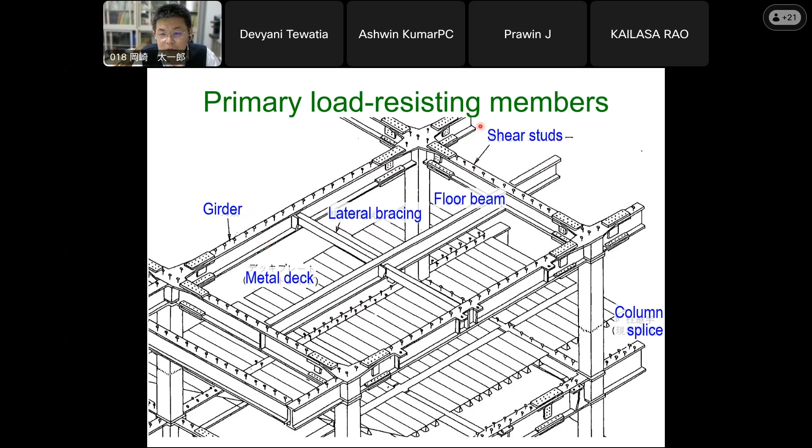Let's look at a real building example. This is a rather high-rise building under construction. This is what the beams and columns would look like in that particular building. The beams, or girders, are I-section beams connected to hollow square columns. The beam flanges are welded to the column, and the web is bolted to the column.

Later in today's lecture, I will go through the arrangement of these connections. On top of the girders, we see the metal deck, and on top of that there will be reinforced concrete cast. We have these kicker braces for the girders and some piping going through.

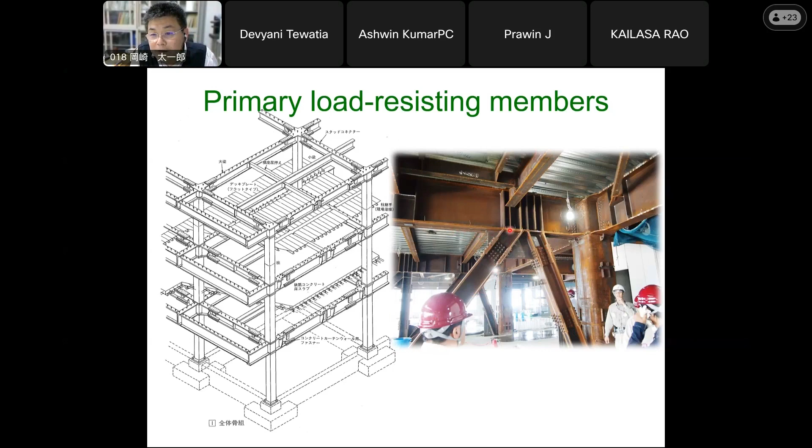The shear studs, small in this photo, are seen here. They are welded directly on the top flange. And the metal decking is tack welded to this flange, not entirely covering the top flange of the beam.

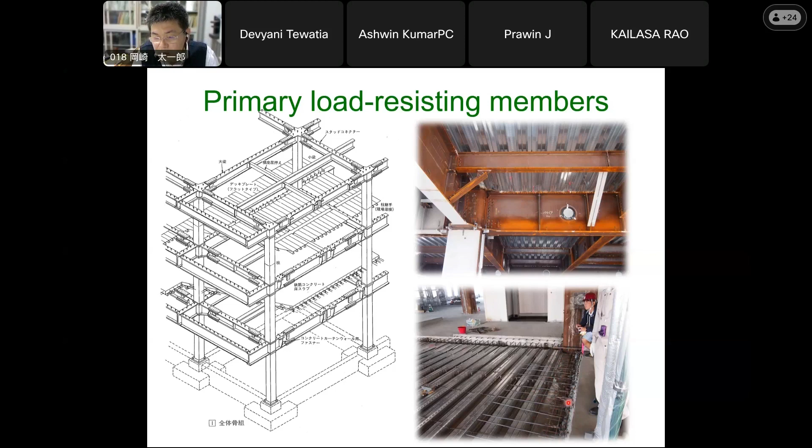Now, the typical steel products used in steel buildings are these. The columns in Japan are typically square HSS, or hollow structural sections. The beams are I sections. We heavily use corrugated metal decks, and most other sections are for supplementary items.

Now, looking at some of the connections in the photo, let's work from the top photo. Typically in Japan, I think this is a construction 7-8 years ago, so these days it's a little different, but we see fireproofing in the form of foam. These days it's more common to use wrapping material for fire protection.

This floor, the equipment in the ceiling is nearly done, so we see a lot of duct running through the structurally, supposedly important girders.

In the bottom photo, we see a column being spliced. And you might notice these white objects that are long vertically - these are the external claddings that are supported on the bottom side at the concrete slab, and probably on the top side by the beam.

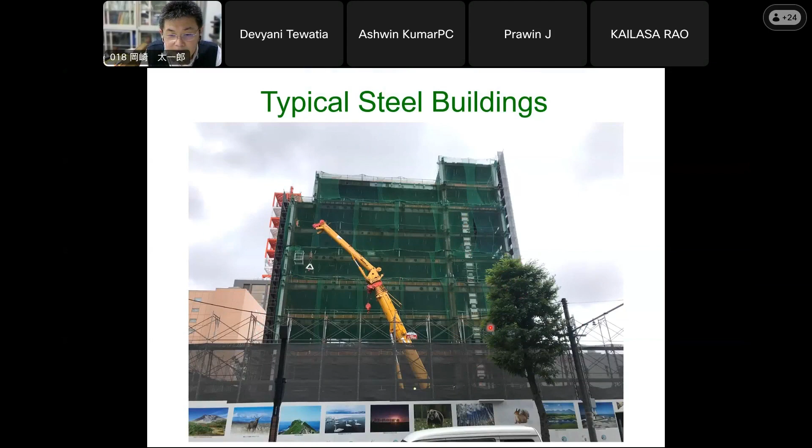Now, one of today's important messages is that typically in Japan, we favor constructing these column trees in the fabrication shop, so that much of the important welds are completed in the controlled environment. We bring these column trees, connect them vertically in the construction site, while connecting the columns horizontally by intermediate pieces of the beam.

This way, we can complete the critical welds in the controlled environment, and in the construction site, we can do much of the erection work by bolting. We do weld in this fabrication shop as in the field.

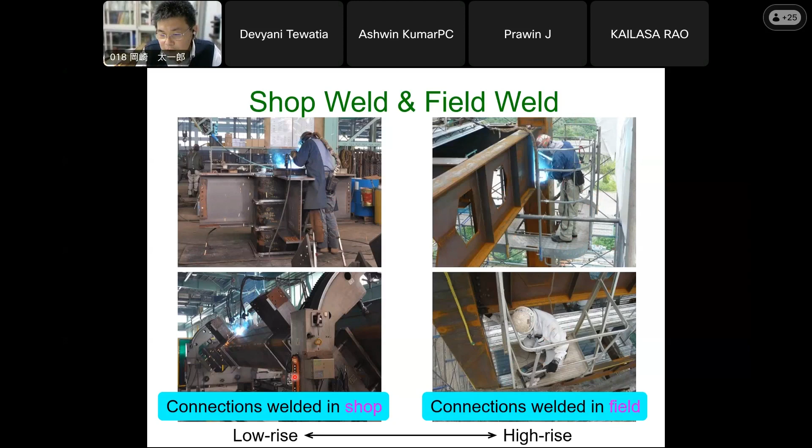Now, this left-hand side is favored, and we do this as much as possible. But when the columns and beams become too big, we need to give up and resort to the construction I'm showing on the right-hand side, which uses more welding in the field. Either way, the primary welds in Japan are done by gas shielded metal arc welding.

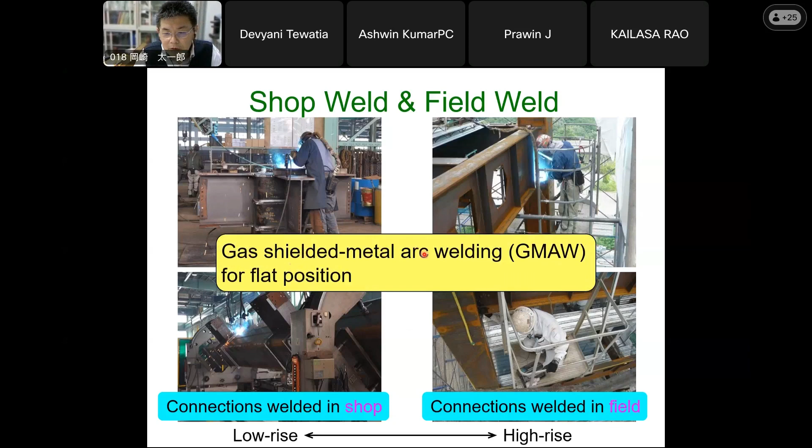Okay, so this is the more favored type of construction. The welds involved would be the welds to insert these thick diaphragm plates through the column. Why do we need this? This is because if you would weld the flange of the beam directly to the column, the compression or tension delivered to the column would distort the tubular shape of the column. So this, what we call the diaphragm plate, is the stiffener to stiffen the section and also to allow smooth force transfer between the beam and the column.

We need such diaphragm plates at the level of the top flange of the beam and the bottom flange of the beam. We need to insert two diaphragm plates at each beam. And this diaphragm plate requires CJP groove weld at both sides of this plate. And that's already a lot of welding. And once this diaphragm plate is inserted, we connect this beam stub to this diaphragm plate: the beam flange by CJP groove weld and the beam web by double-sided fillet welds.

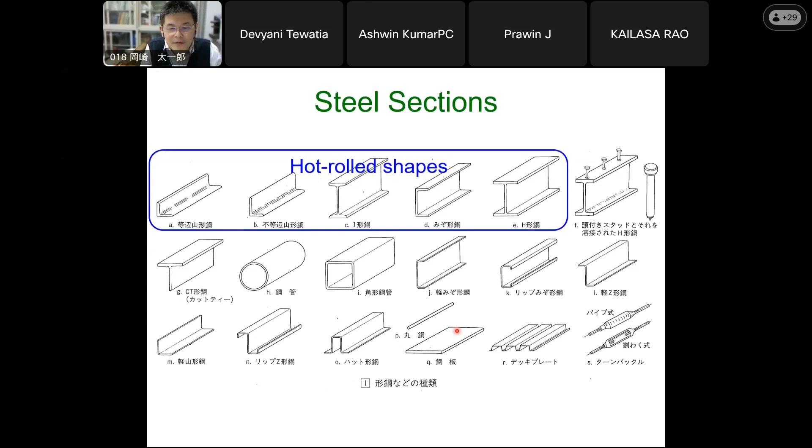This is the same diagram I showed. These are the steel sections, but they may be categorized by the way they are made. There are the hot rolled shapes, and there are the cold formed shapes and the light gauge shapes. Now, for beams and girders, we use I sections. For columns, we use these hollow tubular sections, especially the square shapes. But these are cold formed from plates.

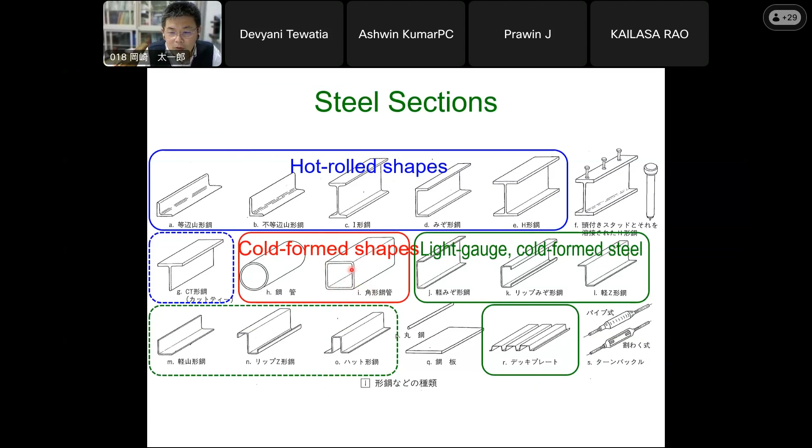Now, the steel approved, allowed, permitted for use in buildings are specified by our Building Standard Law. And the Building Standard Law says that there's this industry standard steel. Now, but this Building Standard Law was established in the 1980s, and since then there has been newer and better steel made available to the market. Those have not been implemented in the law, but instead they are approved per company, per factory by the Minister of Construction.

So I mentioned this last time. In Japan, there is the industry standard steel and the minister approved steel. It's a peculiar arrangement probably, and we have a variety of steel, but the primary ones are SS steel, SM steel, and SN steel. These steel grades are for hot rolled shapes and plates.

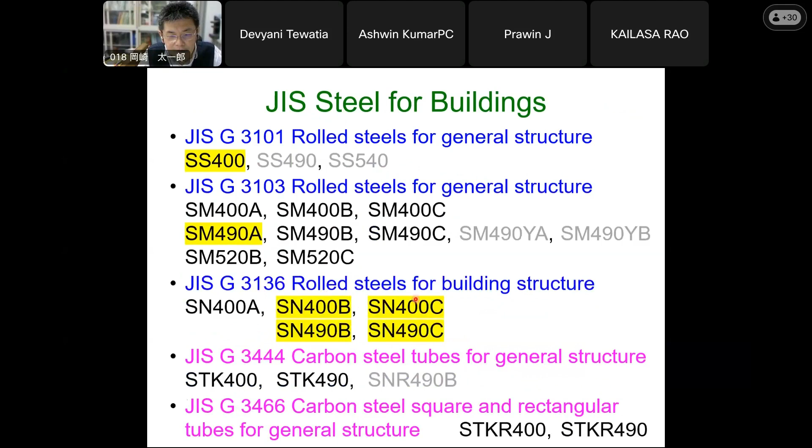Now, we also have the other category, minister approved steel, which tends to be more special, but for columns, we use BCR and BCP. These are formed from, flipping back one page, this SN steel, which is the primary structural steel we have available today, but because they are cold formed, they are categorized separately. These are essentially the same as SN steel.

So looking at the types of steel available in Japan, we have a big variety, but the primary ones are here. And among the primary ones, the really primary ones I highlight in yellow. Now, I compare this against what is used in the US or the EU. I'm not very familiar with what's done in Europe. And anyway, Europe doesn't do much seismic steel design. So comparing against what's done in the US,

to my knowledge, in the US, they almost always use this A992 steel, which has the strength grade of 345 for yield and 448 for tensile strength. Looking at what we have in Japan, the grade is somewhat lower, but this 490 grade is not too different. So what we use in Japan is not too different from the US, but anyway, we have a variety available in the market. We do have stronger grades, and the stronger grades are used for high-rise buildings.

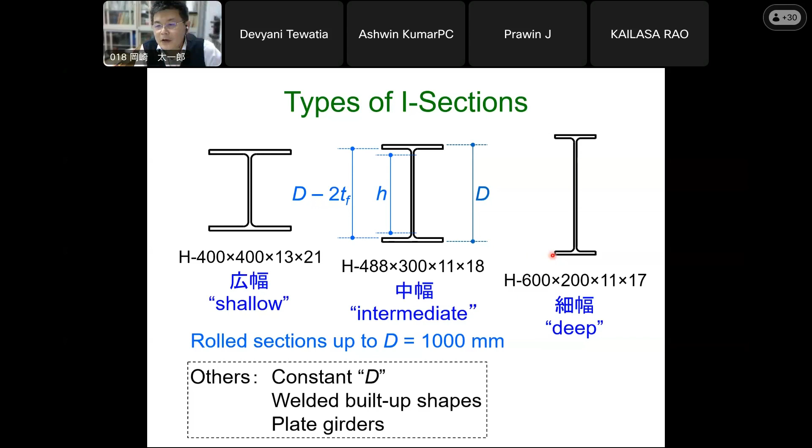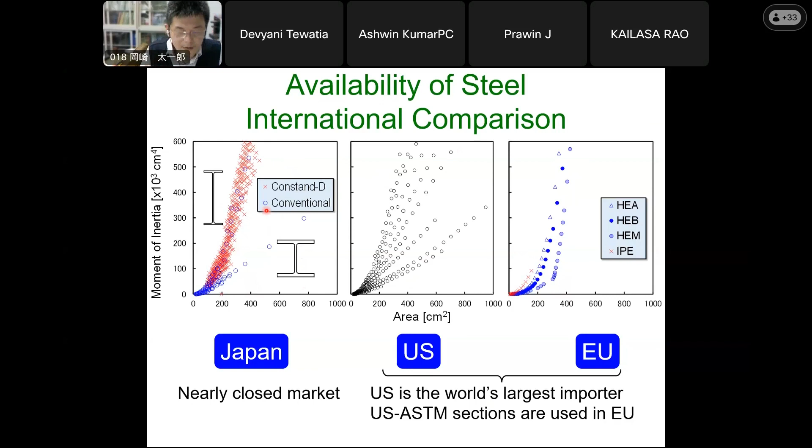Now, the reason I'm emphasizing this is that I hear from my international colleagues that one of the reasons steel is not very common in their country or area is the limited availability of variety. Even in Europe, the variety is much fewer than what's available in the US. Now, even compared to the US, the variety available in Japan for beams and columns is quite a lot.

This is one of the areas where our industry has placed a lot of effort. If there's more variety, the engineers can come up with more economical solutions so that steel buildings become a more feasible option.

Now, moving on to the next subject, a little bit on quality control. I will talk more about quality control in the last part, but let me try to summarize first before going in there. I mentioned the abundant variety of steel grade. The abundance is in dimension, but also in grade.

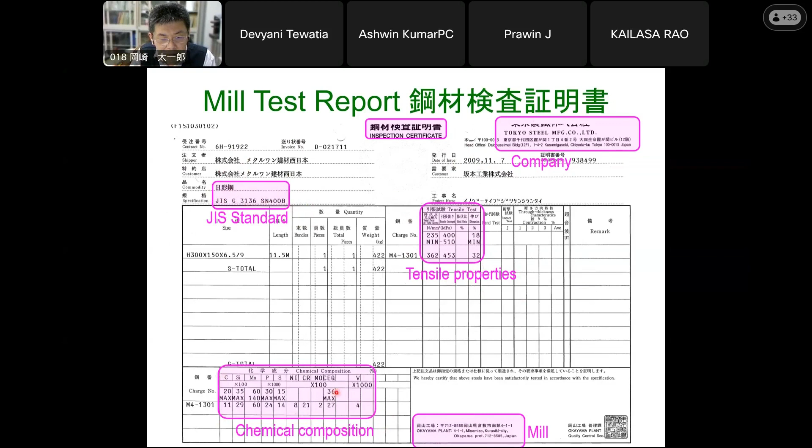The mill test report needs to identify the name of the company and the name of the particular factory or the mill that produced this. The mill test reports produced by a different company may look a little different. In this case, it says that the delivered steel qualifies as Japanese industry standard SN400B. The sheet gives the tensile properties and the chemical compositions, which were the basis to judge that it qualifies as SN400B. It also gives the name of the company, I'm sorry, it's trimmed out, and the name of the factory that produced the steel. This information is required for quality control.

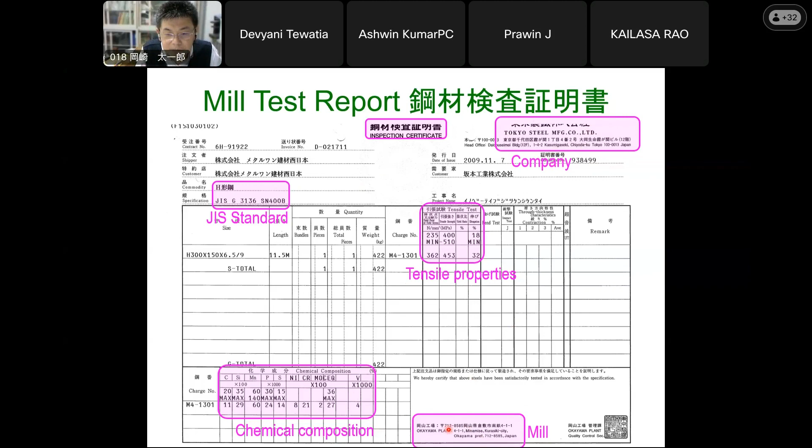Now, among the schemes that are adopted for quality control is this fabricator certification. Actually, it's not all, but most, the vast majority of steel fabricators earn this certification. There's a grade J, R, M, H, S, and S is for probably super, is the highest grade. The number of fabricators we have is something around 2,000, and only 1% of those 2,000 qualify as the super grade. Now, S is probably for super, H is for high, and M is for medium.

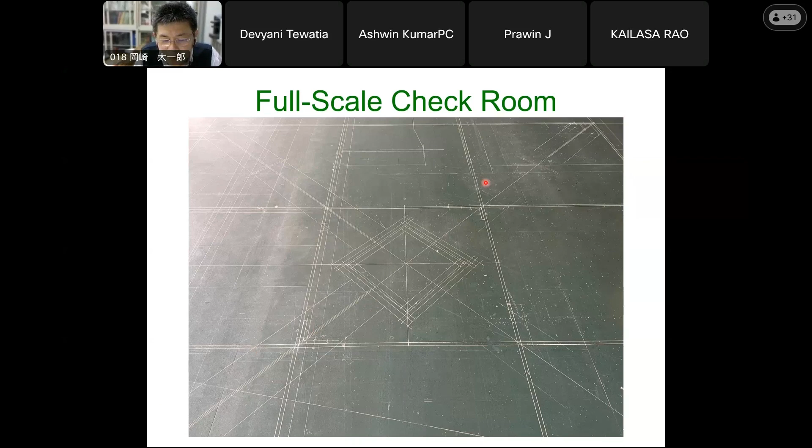Now, this is interesting. This photo has historical significance. This is a one-to-one drawing of the connection that is drawn on the floor. This is probably the plan view of the column and the beam connecting into this, and very straight lines. This is really drawn one-to-one, and if you go to steel fabricators in Japan, you might come across a room like this, typically in the roof floor of the shop.

Probably 30 years ago, this floor was full of chalk drawings, so that the engineers could come to discuss the detailing of connections and the complicated arrangements of the steel work.

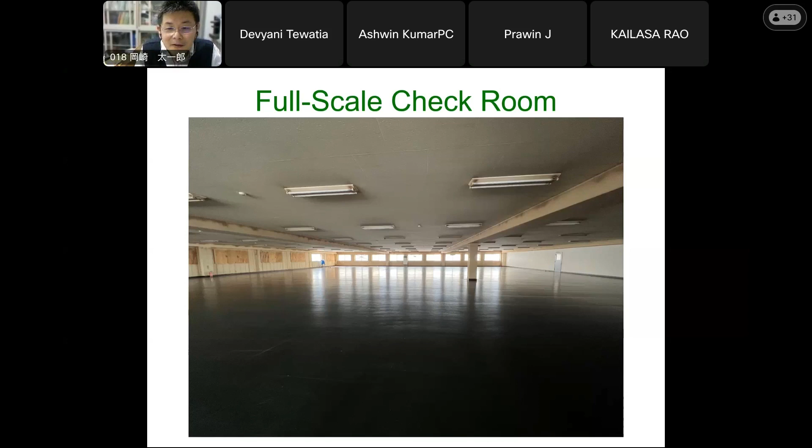Maybe you're wondering, yes, this is old-fashioned. These days, everything has been replaced by AutoCAD, computer-aided design, and looking at monitors. Sometimes, because this floor area is available, they would print the drawings one to one and spread them on the floor. But otherwise, this check room is historical.

I mentioned that all the primary welds, or most of the primary welds in Japan, are done by gas shielded metal arc welding. I'm not aware of any other country that does this. I know that in Europe and the United States, flux core arc welding is the primary type. I don't know what it would be in India. This is a semi-automatic welding process where the wire is being fed as the welder is welding, and simultaneously there is shielding gas shot around the electrode. The shielding gas is a mixture of carbon dioxide, maybe not entirely good for the environment, and inert gas such as argon and helium, such that the molten weld is secluded from the atmosphere, especially oxygen.

Please keep note that this is the choice of welding process favored in Japan. The same gas shielded metal arc welding is done in the fabrication shop or in the field.

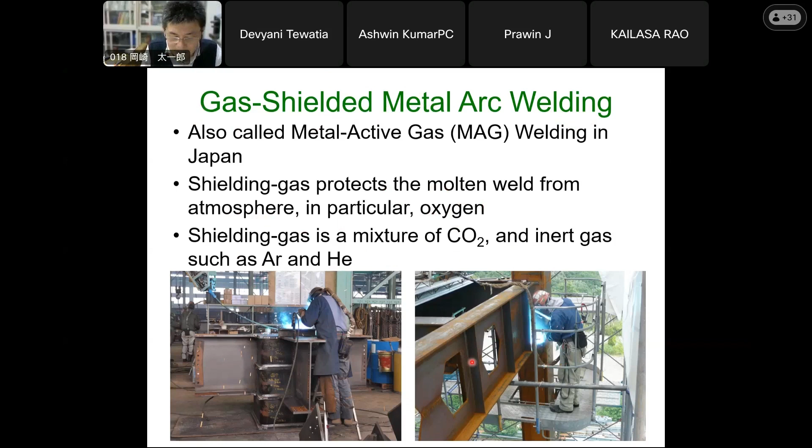The quality of welding is controlled in two ways. One, by licensure - all welds must be completed by welders with the right license. The license is classified by plate thickness, the welding procedure, the groove geometry, and whether or not backing is used to complete the butt weld, and the welding position: flat, vertical, or overhead. There is a license for simple welds and all variety of more difficult welds. Welders need the right license to complete the welds, and there is a record kept on who, with what license, made each of the welds.

Of course, a license is also required for the weld inspectors. Now, the second scheme for quality control is the inspection. All columns and girders are checked for quality control by ultrasonic testing, as well as visual inspection and direct measurement. The sections, dimensions, and length, especially of columns, are measured, and I believe they have to be within 2 millimeters, otherwise they cannot be delivered to the construction site.

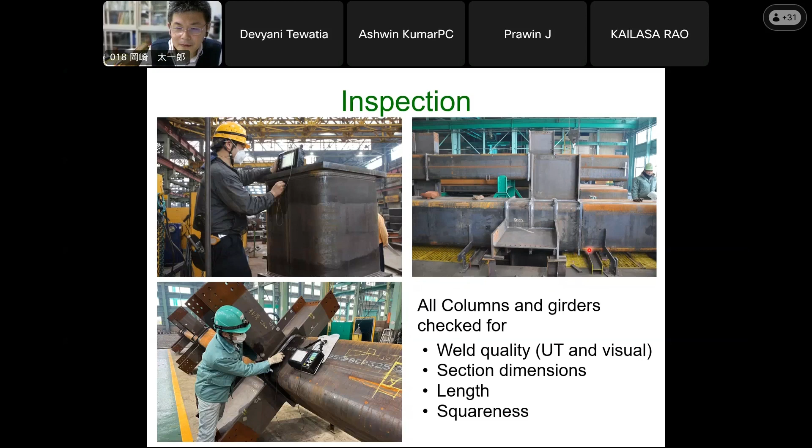Now, moving on to how buildings are actually constructed. I'm putting together the information I've discussed so far, with more details, to walk you through how buildings are constructed from steel - from the mill, through the fabrication shop, to the erection process.

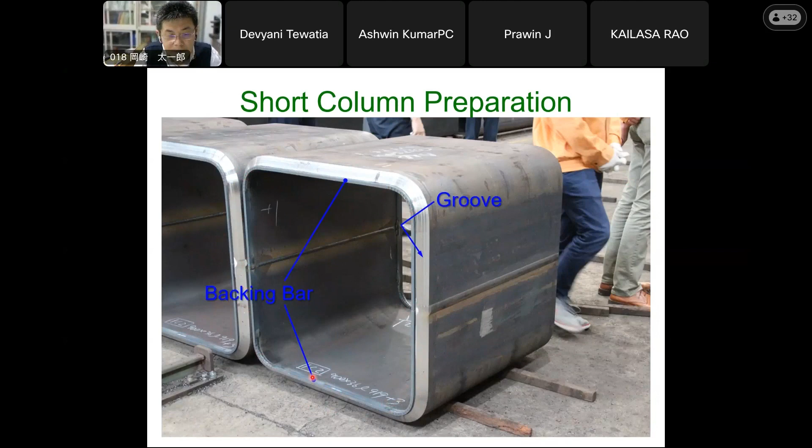Okay, the backing looks like this. We have these perfect backing plates. They perfectly match, wrap around the corner and match the section. Let me go back one step. So probably it needs to be cut to adjust the length, but otherwise it wraps around the corner nicely, so that we have continuous backing around the section. The backing bar is attached by tack welding, and this fabricator is also welding these slits to stiffen up the backing bar.

Now, such a short segment of square HSS is attached to two diaphragm plates. The backing bar is hidden here, but we see the root of what's going to be the groove weld. There's another tack weld attached to connect the backing bar to the diaphragm plates. Now, these two grooves between the short HSS and the diaphragm plates are going to be completed with CJP groove welds.

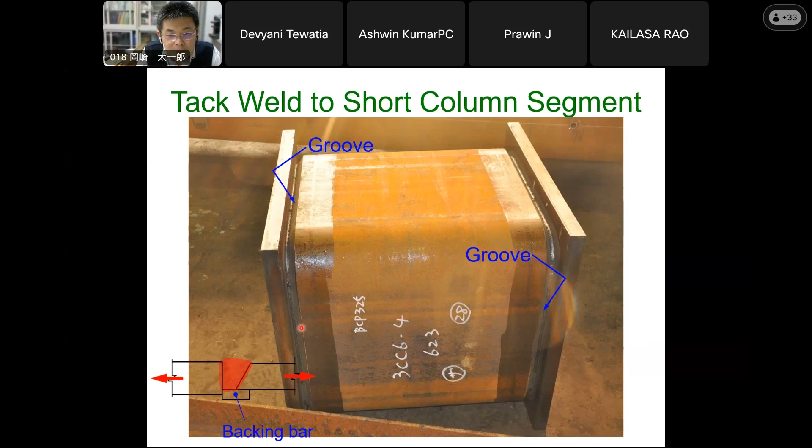Oftentimes, this is automated. These closed sections are favorable for robotic welding because you might see that this table has the shaft so that it circulates. As the column is rotated, the robot only needs to make sure it is following the groove. And the rate is controlled so that the weld may be placed continuously without overheating the weld.

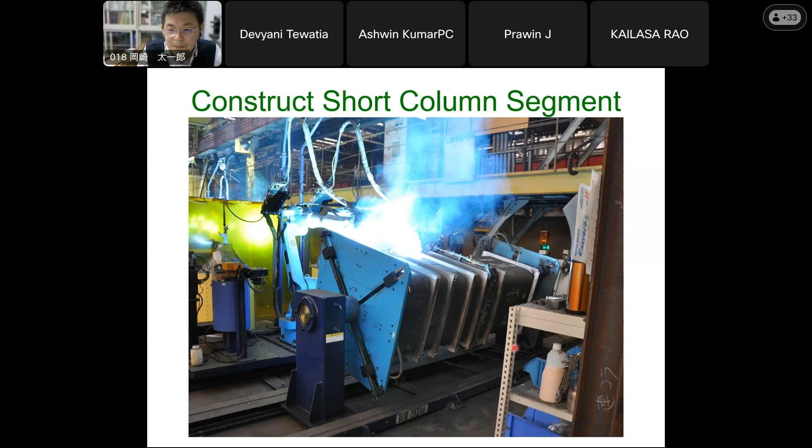Okay, so once this piece, which we tend to call the dice, formed by the short HSS and diaphragm plates, is done, this is the first CJP weld completed, so this needs to be inspected. It makes sense to inspect at this stage because we don't want to find problems after everything is assembled. Okay, inspection is done here.

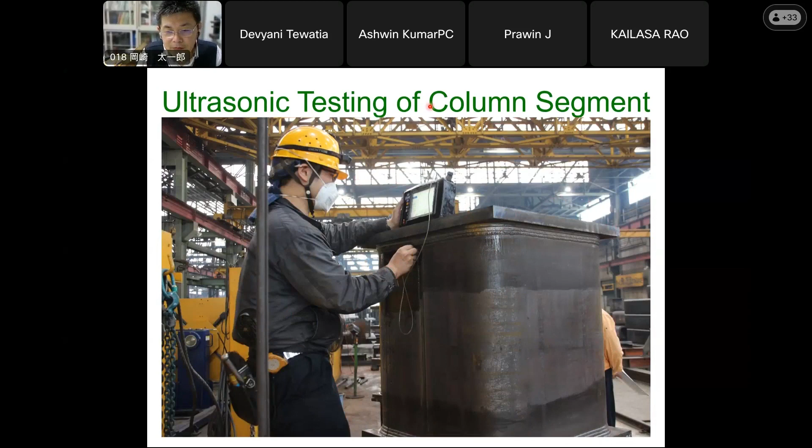Afterwards, the beams are coming in. The beams are cut by bandsaw. And if there are bolt holes, the bolt holes are drilled. And this same machine that drills bolt holes also prepares the groove and the weld access holes. You might notice this is a rotating blade, which is placing the groove at the top and bottom flanges simultaneously as bolt holes are being drilled.

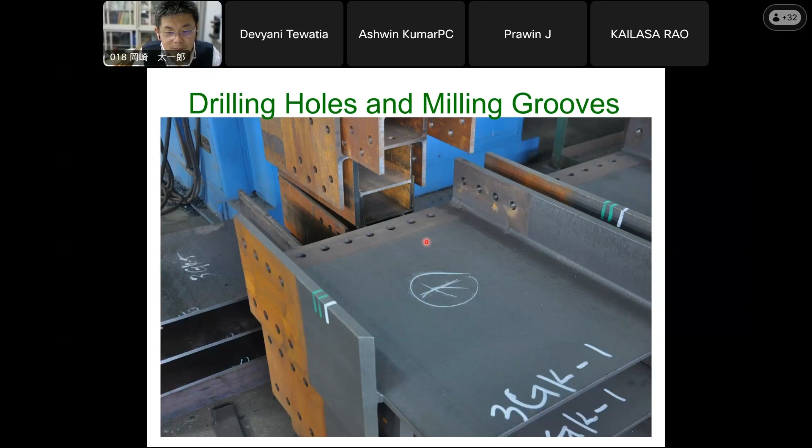Okay, the short beam stubs may look like this. The side closer to the bottom right is going to go to the column, and the part farther apart will be bolted to intermediate beams at the erection site. Such beam stubs.

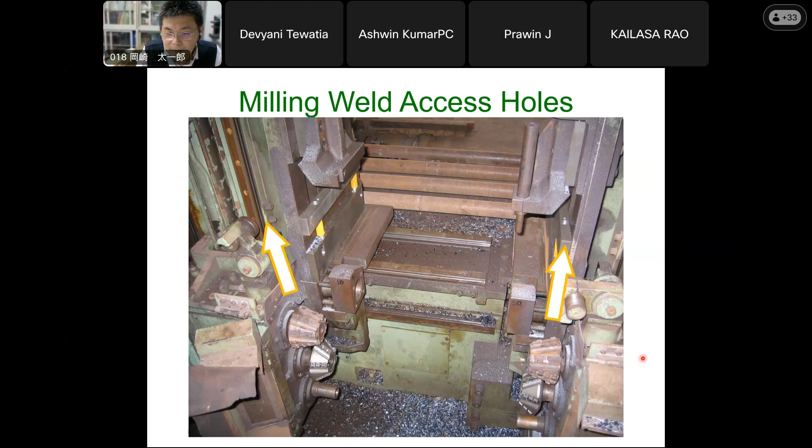Okay, this is another view of the similar machine that prepares the groove and the weld access hole. The weld access holes, as well as the groove, are completed by a set of blades. There are two tables on the left-hand side and the right-hand side. These go up and down to complete the weld access holes as well as the grooves. The short beam stubs may look like this or this.

Now, in the old days, there was always a weld access hole to complete the CJP groove welds for the beam flanges, but more recently, the fabricators are comfortable with completing the beam to column connection without a weld access hole. Now, this is possible for a couple of reasons.

One, this piece is being fabricated in the fabrication shop so that the CJP groove welds can always be placed continuously from outside. If the welder needs to complete the welds in the fixed position, they have to place this weld from above. But the welder only needs to flip this piece upside down so that he or she can complete this weld from outside.

After the 1995 Kobe earthquake indicated problems with weld access holes, people started shifting to removing the weld access holes entirely. Probably nearly 90% of the larger fabrication shops would be adopting this no weld access hole procedure.

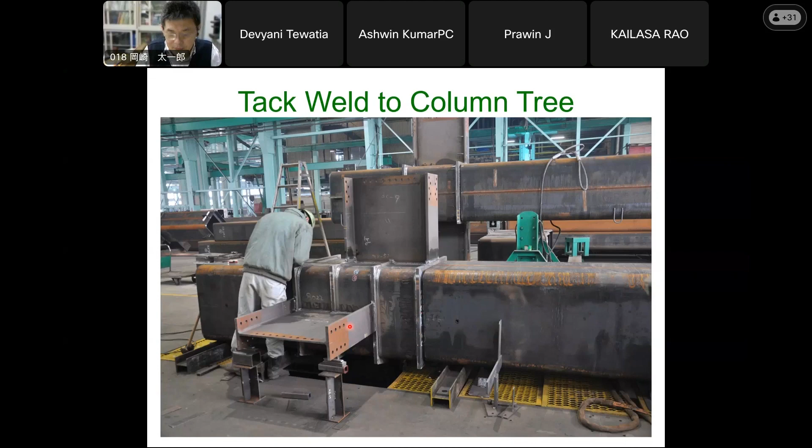The big welds are typically done by robots. We have one connection piece with many beams coming in, a second one, and there may be a third one outside of the frame. I didn't bring video today, but this machine rotates the column, and in this case there are two robotic torches that just need to follow the groove. And of course, at this stage, the inspection is done.

If you go to a steel fabricator in Japan, there will be many of these pieces. Each of the big pieces may be priced at something - I'm sorry, I cannot convert to Indian rupees - but in US dollars, the big pieces will be priced at something like 30K or 50K. A lot of work, not a lot of steel, but a lot of work.

There's not much to talk about for the beams, but sadly there is, because there tends to be many stiffeners and many holes.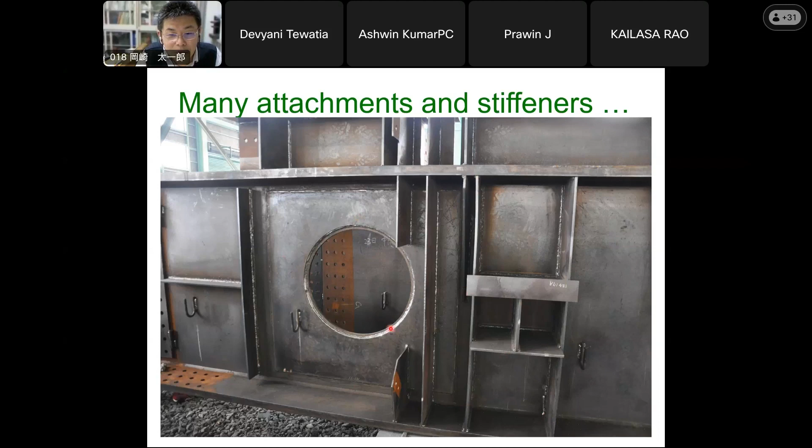For bracing connections, the bracing connections might be done like this. The bracing connections may need to go to the column as well as to the beam, so it's good to extend the beam stub a little further, so that the gusset plate or the bracing connection fits within the column tree.

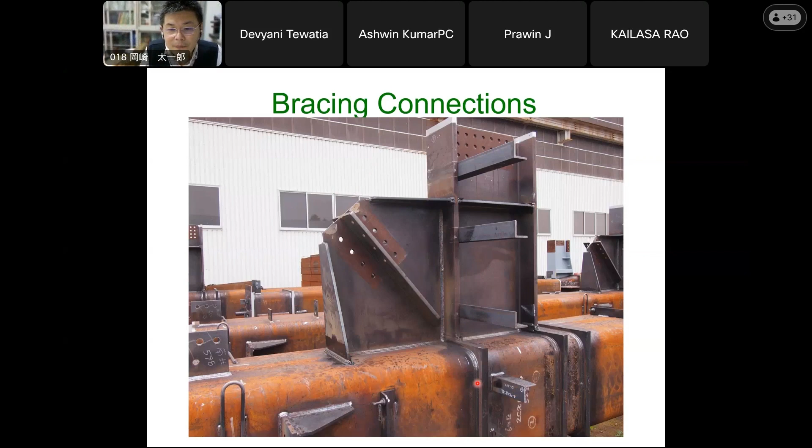Now such a piece is brought to the construction site. These column trees are connected vertically to each other and horizontally through intermediate beams.

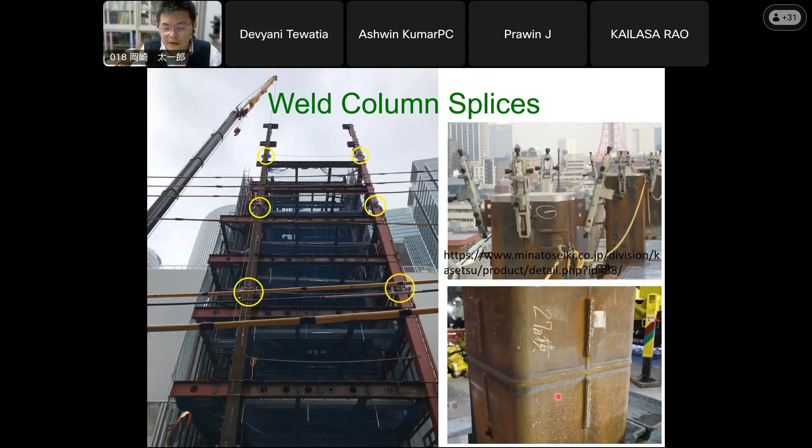The primary pieces would be the column tree and the intermediate beam portions. I emphasize the fabrication of the column tree because there's a lot to it. A lot of welding and a lot of quality control.

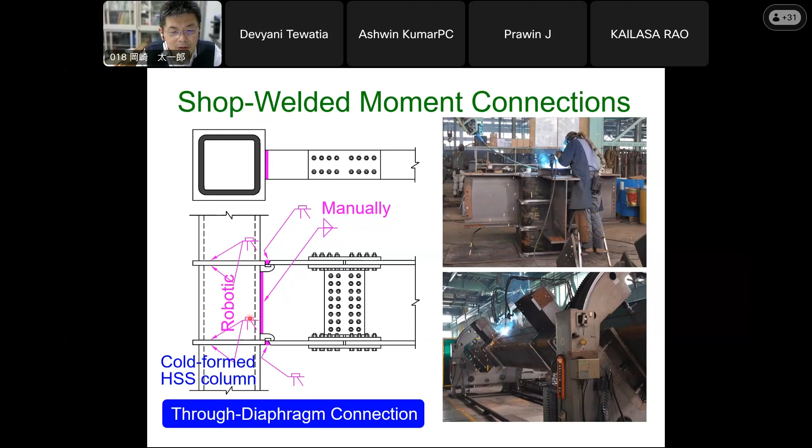Now, I thought it's worthwhile to mention a little bit about column base connections. In Japan, we say that there are 3 different column base types. One where the base plate is exposed above the foundation. The second type, the column base plates will be further wrapped around with reinforced concrete. If you wrap the column base with reinforced concrete, you can stiffen up the column.

Another method to stiffen the column is to embed the column base inside the foundation. This would typically mean that the column base plate will be buried in a deeper part of the foundation, and after the base plate is anchored, the upper part of the foundation will be completed, filled with reinforced concrete. Anyway, the encased method and the embedded method require a lot of additional work. Therefore, the vast majority of steel buildings that do not have a basement will adopt this exposed column base.

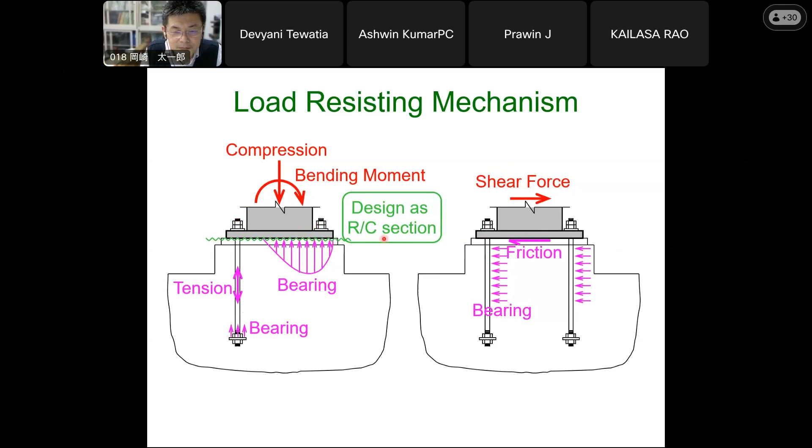Looking at the possible failure modes or the load resistance, we expect compression to be delivered through bearing against the foundation. That's fine. But when there's bending moment, we rely on the anchor rods to resist, and they help substantially in resisting. The anchor rods are also expected to bear against the foundation to resist shear force. But by far the most important is what to do with the tension delivered to the anchor rods. Typically, these exposed base plates are designed by viewing this green section as a reinforced concrete section. The issue is how to develop these anchor rods.

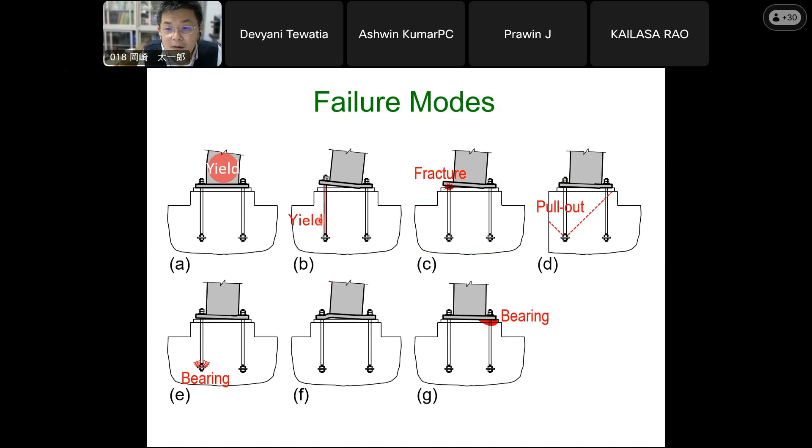The failure modes may be categorized into these, but there are favorable ones and non-favorable ones. The favorable ones would be these three, because the ones that I crossed out, this one's also bad. Fracture is definitely bad, but anchor failure and crushing failure and pull-out failure are very non-ductile. Bending of the base plates is probably good, but this is not chosen in Japan. So engineers either choose to yield or form a plastic hinge in the column, or to allow the anchor rod to yield and extend.

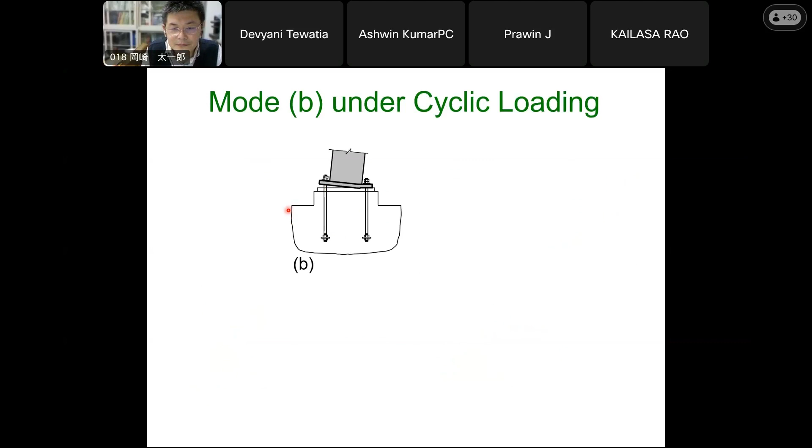You repeat this a couple times, then the anchor rods will all be extended like this. You might notice that there is no moment resistance in this system until the base plate rotates enough to engage the elongated anchor rod.

There is good ductility in such behavior, but we have to make sure that these anchor rods behave in a ductile fashion.

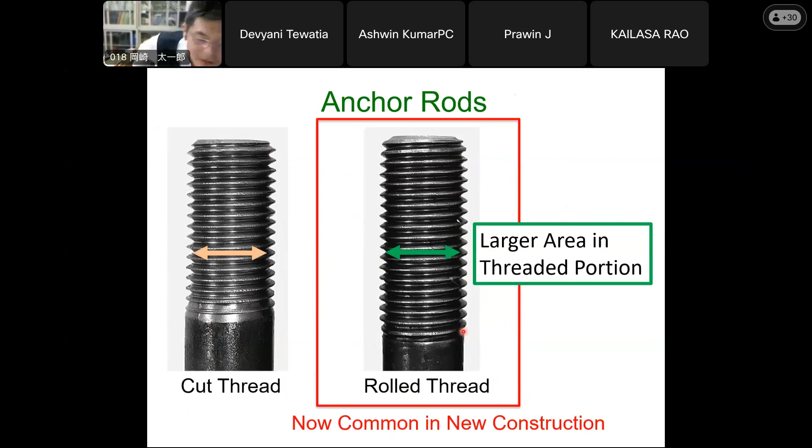Now, let me move on to the last section of today's lecture. How are high-rise buildings constructed?

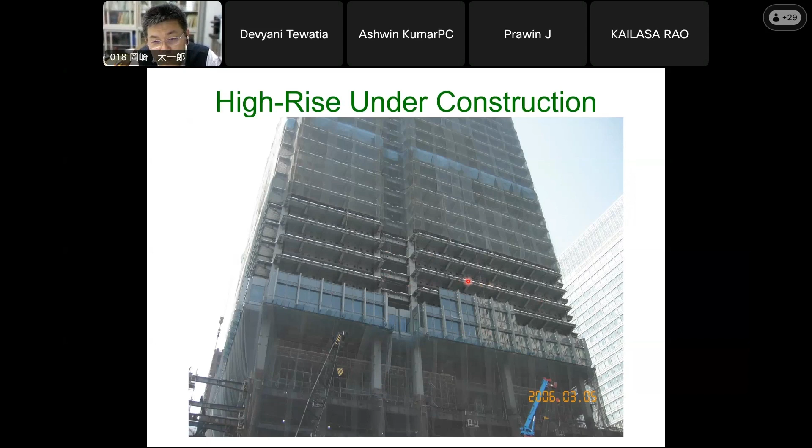A close-up view, you might notice that the I-section beam has widened flanges near the beam-to-column connection. And in a magnified view, the column is a square shape, but it is so big that it goes beyond what can be bent.

These are welded, built-up column sections. We don't have that protruding diaphragm plate. Instead, it's not visible, but I'm pretty sure there are diaphragm plates welded inside this big column. The beam flange is now welded to the column, and the weld must have been completed in the field. The beam web is bolted to the columns, through a shear tab, even though it's not clearly visible.

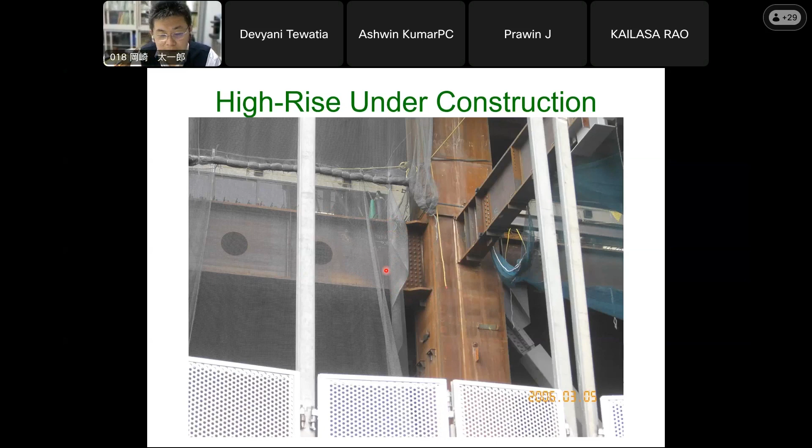This is another high-rise building under construction. This is more recent, but this one surprisingly is using diaphragm plates. Now, this is an oddball, but the reason I chose this photo is to show this.

This is what they have to do when the column grows smaller as you go up. Right in the panel, in the beam-to-column connection, this is an odd shape. The cross-section of the column is growing smaller as you go up, and the transition of column dimension is done inside the connection.

Anyway, the typical construction for a high-rise building is done like this. The column is built up by welding, and these big welds for thick plates are done by submerged arc welding. And in the connections to the beams, we need the diaphragm plates, and those diaphragm plates are placed inside this built-up column through electroslag welding.

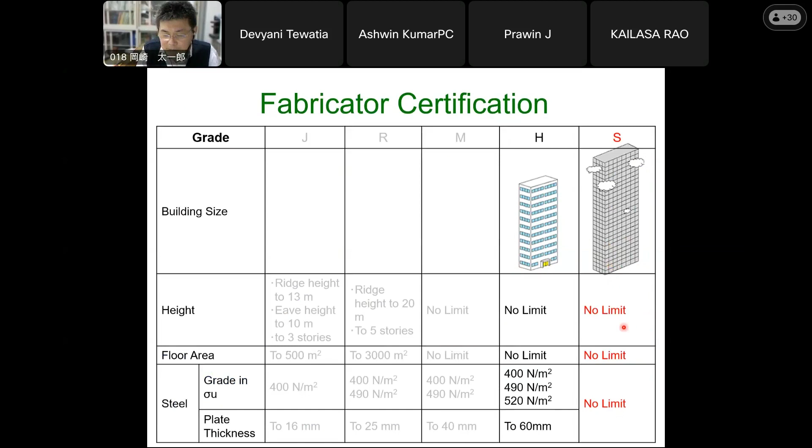Now, the fabrication for high-rise buildings would be done by H grade fabricators, but the really high rises will be done by the S grade fabricators. You might notice that is because high-rise buildings tend to use higher grade, stronger steel and thicker steel plates.

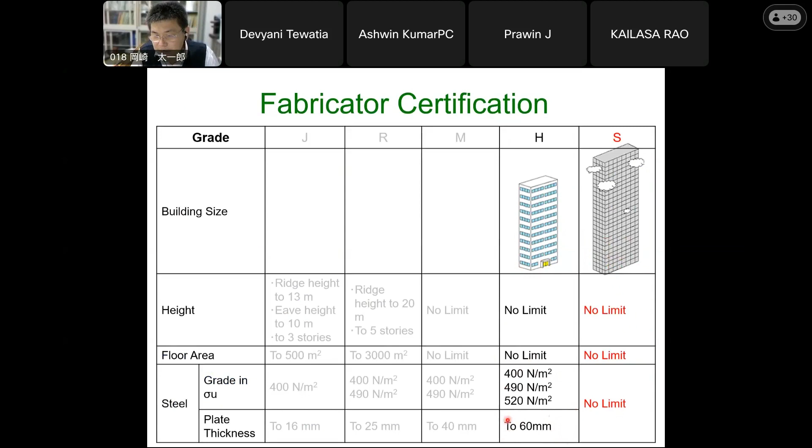Submerged arc welding is a special type of weld that places a flux in the form of sand and dips the electrode inside the flux. The equipment is so large that it has to be guided by railing. Now, this type of welding procedure is very well suited for big volume welds that travel straight.

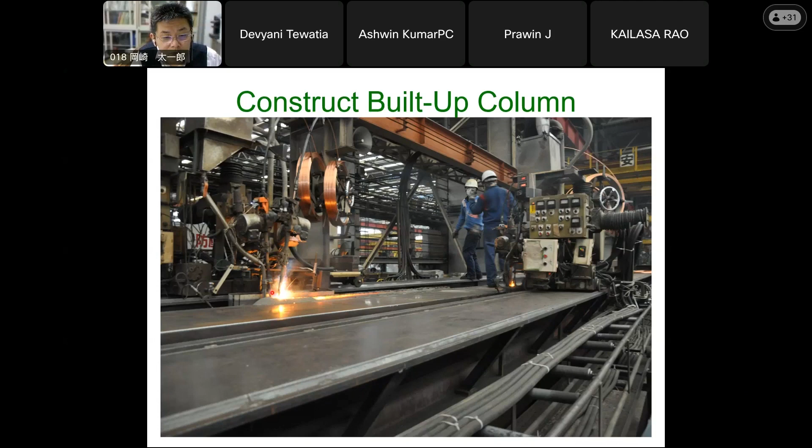So after the weld is completed, it might look like this. And if the weld exceeds a certain size, it may take more than 1 shot to complete the entire weld. The weld is started and ended outside of the primary section, and this part sticking outside is actually runoff tabs. This part will be torched off and not used in the building.

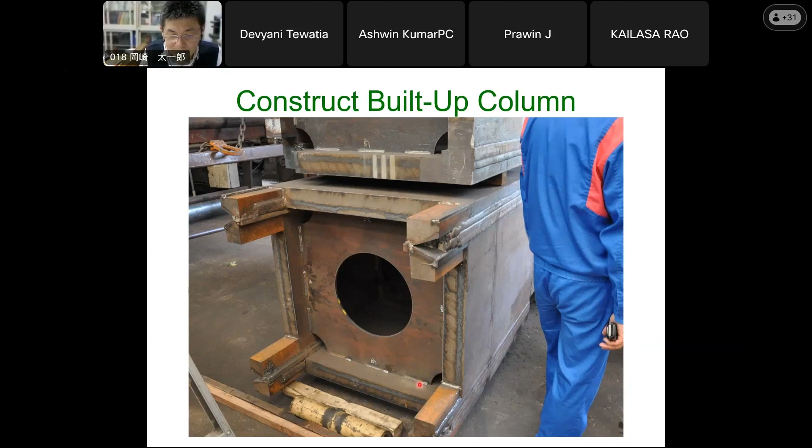Okay, these diaphragm plates serve temporary purposes so that the plate does not distort during and after the welding, as the steel cools. Now, where the beam comes in, we need to place the interior diaphragm. The interior diaphragm is placed by electroslag welding.

Electroslag welding, okay, I have never had the opportunity to take a photo of this being done, but this is done by pulling up the torch vertically. It's similar to submerged arc welding in that the torch sticks through flux, but it travels vertically upward. This welding procedure is very good for the purposes of placing the straight welds for this diaphragm plate.

This is a diaphragm plate, and this is a diaphragm plate. There is backing at four sides of this side of the diaphragm plate, and there's another one at the other side of the diaphragm plate. Okay, four side backing at both the top side and the bottom side of this diaphragm plate. And the hole you see here, 1, 2, 3, 4. This is where the electroslag welding is going to be placed. And there's a vertical tunnel, and the torch travels through this tunnel.

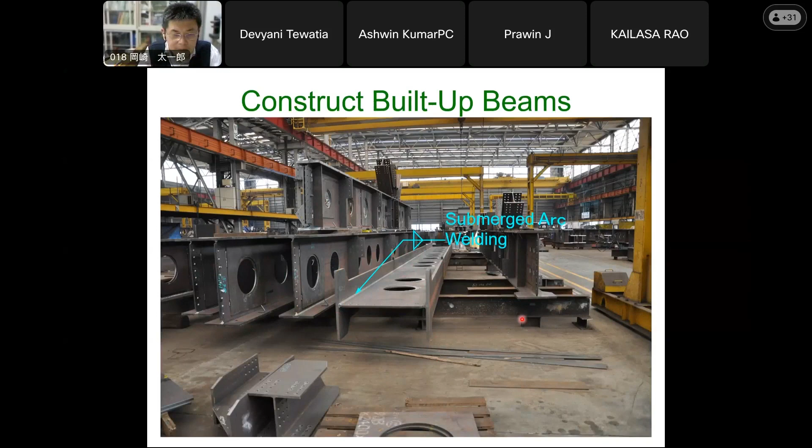Now, submerged arc welding is also used to make built-up beam shapes. Okay, these are built-up I sections. Some are widened at the ends to achieve better seismic performance, like here. Another example of the beams has widened flanges at the ends so that the connections can perform better against earthquakes. This can be done for built-up shapes because the beam flange and the web and the other beam flange, they're all cut off from separate steel plates.

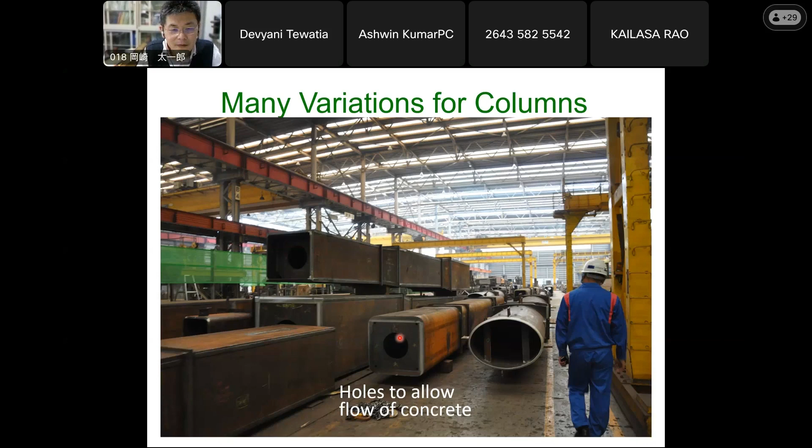These columns may have circular holes in the diaphragm plates or all plates inside. The reason for these holes is to allow concrete to go through. So the Japanese adoption of square hollow shapes for columns gives a good opportunity to convert these columns into CFT, concrete filled tubular shapes. Okay, again, beams may come with many attachments and many holes. It's sometimes sad to see these.

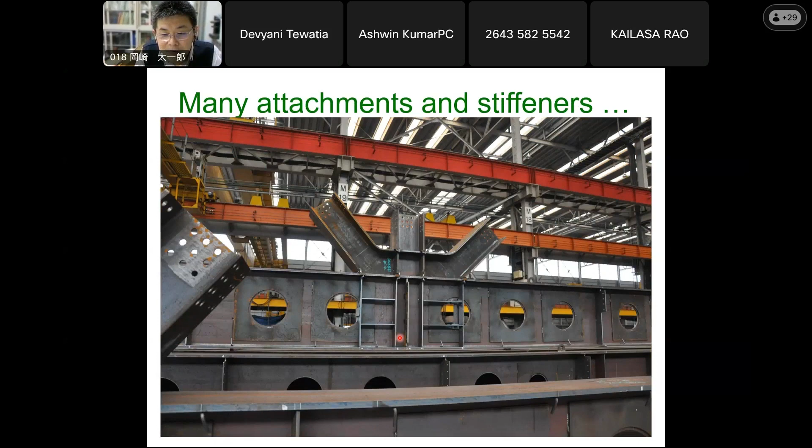Okay, to wrap the discussion for high-rise, typically the columns are a piece of its own. It does not come with beam stubs. It will come with the shear tab, but not with the beam stub. The column is delivered as a column. The beam is delivered as the whole beam, and they are connected at the construction site. This procedure requires field welding. So I hope I was able to emphasize the substantial difference in construction type between regular buildings and the really high-rise buildings.

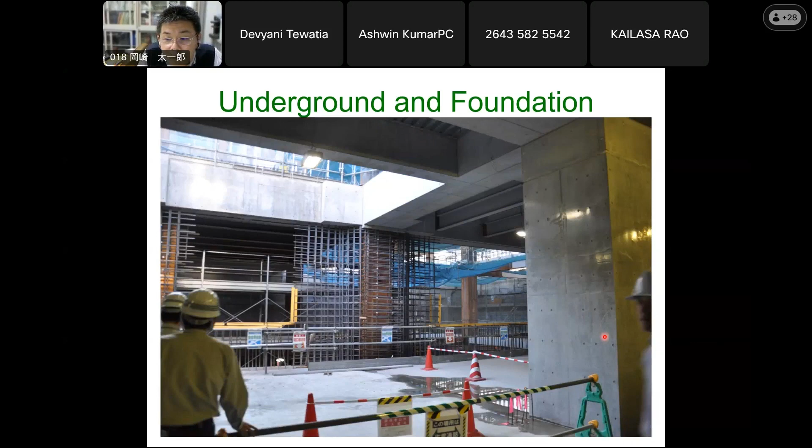Okay, so let me wrap up today's lecture with major points that I wanted to communicate. The popularity of steel construction in Japan is supported by a very large selection of steel, both in material, grade, and size, but also through very close attention to quality control. Our columns are predominantly square tubes. For regular structures, they are cold formed shapes, but for big high rises, they'll be welded, built up boxes. We try to complete as much of the critical welds, especially at the beam to column connections, in a controlled environment. This is because our seismic design typically requires fully welded joints at these critical connections.

Okay, the column tree construction is very typical, but the column tree works only to a certain size, because if the column and the beam grow too big, the column tree size combined will exceed what can be transported by the truck. Now, quality control is crucial. I cannot emphasize this enough, because the particular construction procedure we adopt ends up placing many welds in critical connections, particularly along the columns.

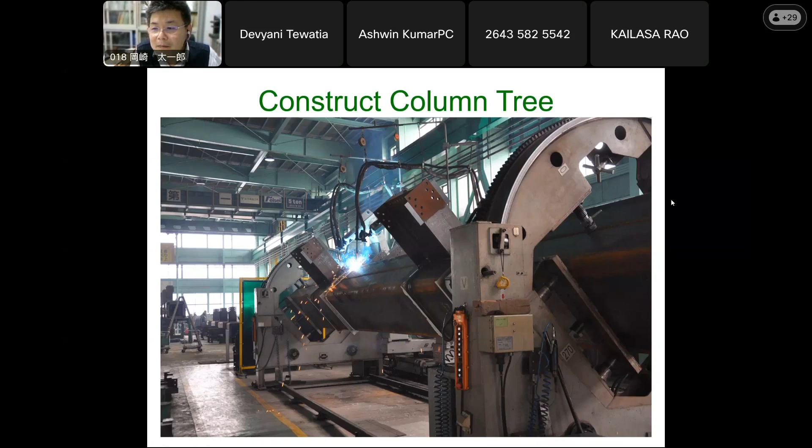There's another question on whether fire resistant steel is used in Japan. I think one of the early ones was invented in Japan, and it serves a certain purpose. There's a law requirement in Japan that the steel column has to sustain load for a certain degree for a certain duration of time. So there's a standardized test, and there's a grade of steel that meets that qualification.

Fire resistant steel, I do not think is all that common. It's not sold in abundance. Certainly fireproofing is the most common option. But there are places where we don't want to use fireproofing, which would be where the architect wants to expose the steel. The first choice would be fireproof painting, but it's a cost decision of whether fireproof painting meets the requirement cheaper, or fire resistant steel meets the requirement cheaper.

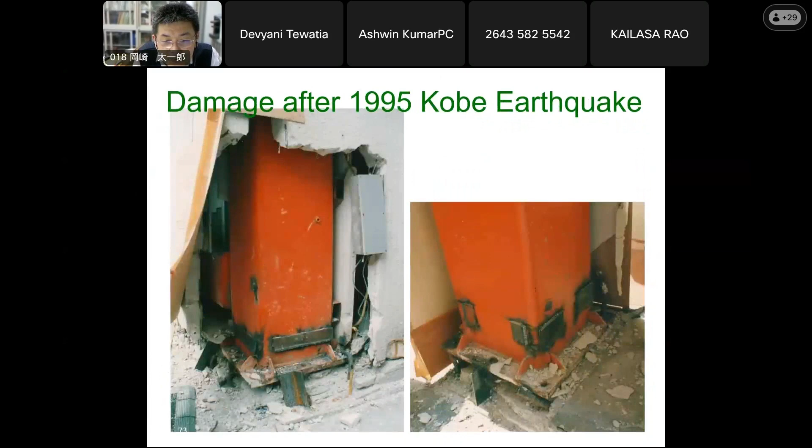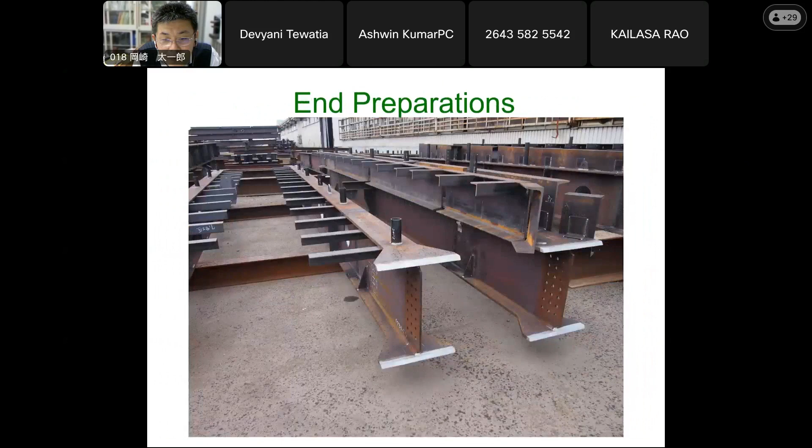I don't think I have the wrapping photo, but I think it's increasingly used for recycling purposes. The foam type fireproofing is very painful to remove, so due to environmental concerns, the wrapping type that can be stapled to steel is gaining popularity. I'm sorry, I'm not very knowledgeable on the wrapping fireproofing.

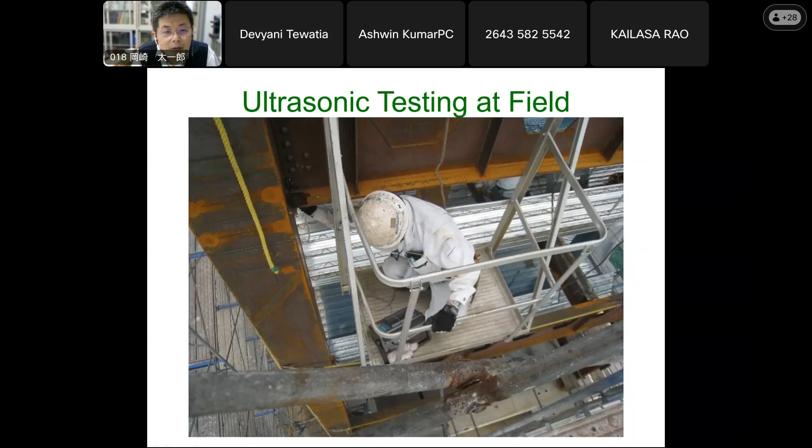Another question: in beam-column connection, why is the web of the beam bolted at the connection, since there was not an angle section connecting the beam web to the column? I'm not sure - okay, here, yes. In high-rise construction, I suppose, for example, American construction requires always welding the beam web, but that requirement does not exist in Japan.

For example, this one is not using a whole lot of bolting. Maybe the reason is that this beam is actually designed to be a floor beam, although it is welded. But this one also does not use many bolts. Maybe it's so long that the shear force is not substantial. But the question is why?

Could you repeat the question again? It is: in beam-column connection, why is the web of the beam bolted at the connection, because there was not an angle section connecting the beam web to the column? Angle section, okay.

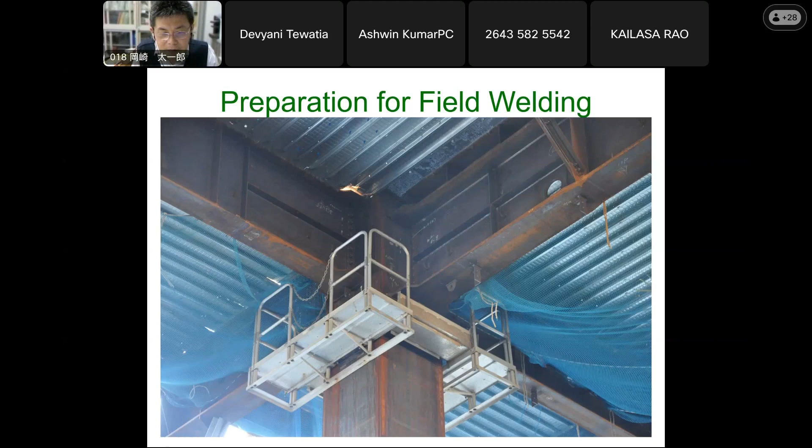Okay, this is an example of the shear tab connected to the column. In the construction site, the beam web will be connected to the shear tab, and the beam flange will be welded to these diaphragms.

So we are not using angles. We are using shear tabs. This, okay. I'm not sure if that answered the question.

Moving on to the next question: how is the length of the column tree stub being designed? The length of the columns... column tree stub. Okay, are we talking about this piece?

This length is dictated by where the beams come in, the location of the highest top flange and the lowest bottom flange. Now this arrangement is not ideal, but it's called a beam stub. Okay, I understand, the beam stub. So the question is, how is this length determined?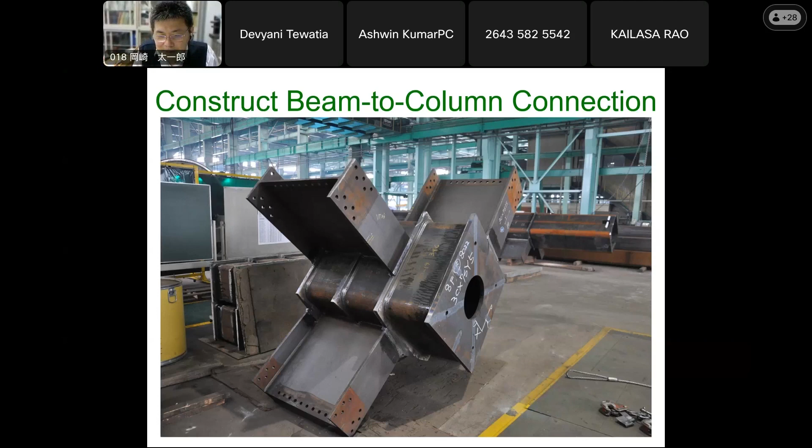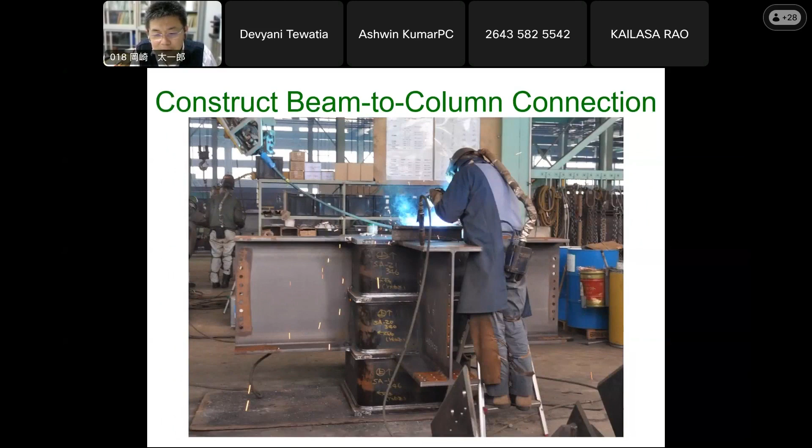Now that is the ideal location, but I think the rule applies everywhere: we need to pursue efficiency, convenience, and economy. That is dictated by what can be put on the truck. If this beam stub is twice as long as what's being placed on the truck right now, it cannot be transported, or even if it can, they can load only one piece instead of two. Therefore, at the end of the day, the typical length of the beam stub is measured as 1 meter from the center of the column. That's quite typical.

Okay, thank you. Another query from one of the participants is how the whole steel structure is grouted to ground, or is it done by concrete foundation?

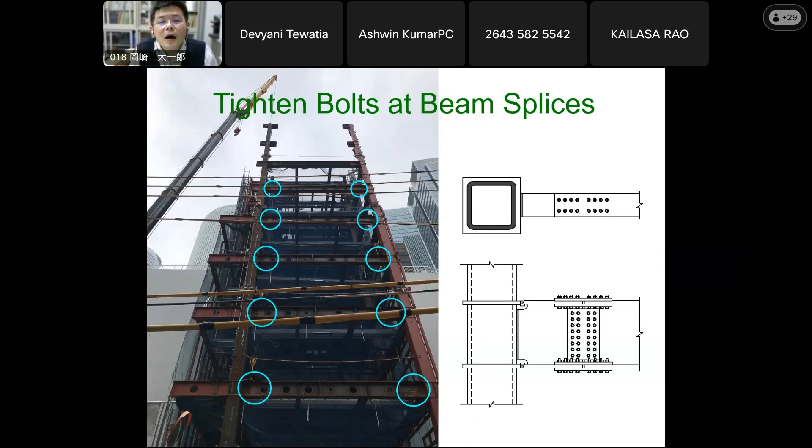Okay, that is... I don't have a photograph of that, but there is a lot of precision that goes in there. The column base is all leveled by close, accurate surveying, so that they would typically align the top of the column base plate to be at even height. So I don't know what would be most ideal.

Okay, let me go back to this arrangement. I think it's done similarly in most countries, but after everything is placed, they put non-shrink grout between the foundation and the base plate. This also means that until that's done, there's a gap. The gap is needed because it's not visible after the grout is made, but there is a nut inside.

I think it's called a leveling nut. So using the leveling nut, they can adjust the rotation and height. After that adjustment is done, the non-shrink grout is placed to really lock the position. I hope that gives an idea that there's a lot of thought for precision that goes into leveling the foundation, and the leveling is done to the base plate.

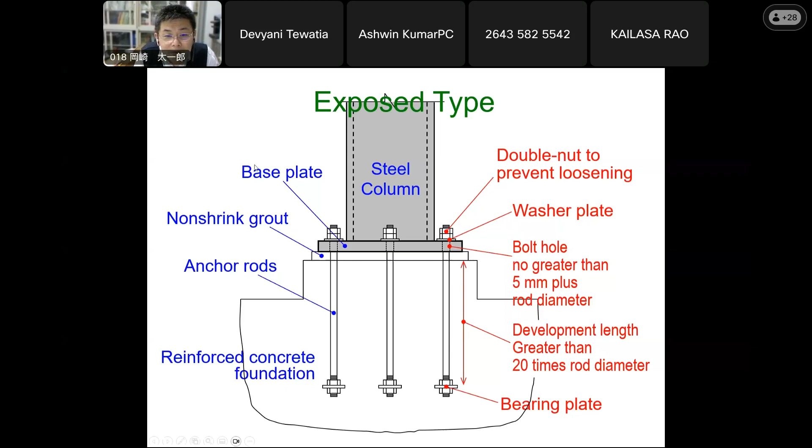But it's not catching popularity. I think one of the reasoner is... let me try to... I'm sorry, I don't have a photo of that. Okay, so maybe this one. This is a case where the diaphragm is protruding the column.

There's another way to weld the diaphragm plates. It would probably look like this around the column. Okay, and this is my understanding of the scale of this. In Japan, we call this the exterior diaphragm.

This diaphragm plate has to be of substantial size. I think that there will also be like this. It has to be substantially big and substantially thick to provide the stiffening effect for the column. And also, we don't want this to be too big, but if you squeeze this too much, we end up failing here. So that is what I understand from the research.

We do have this exterior diaphragm option, but probably because it ends up being big, it's not gaining popularity in Japan.

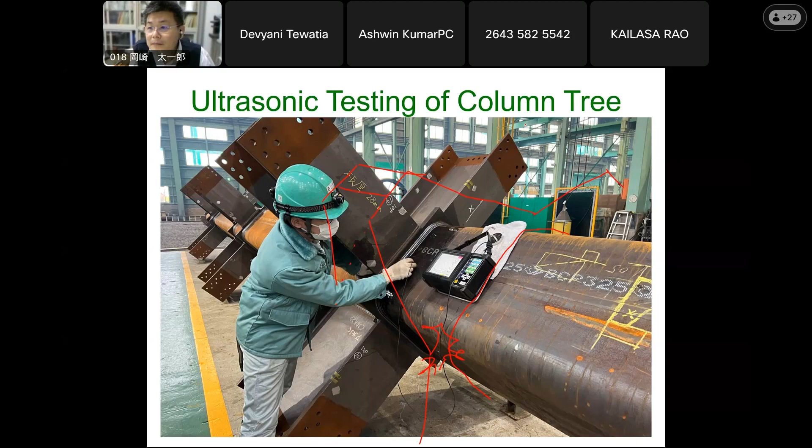Another query is, can you please explain the benefit of the proprietary column-base connection? Okay, yes, this one. The whole point is that if you are to design this on your own, you have to check at least all these limit states, and it can be quite cumbersome.

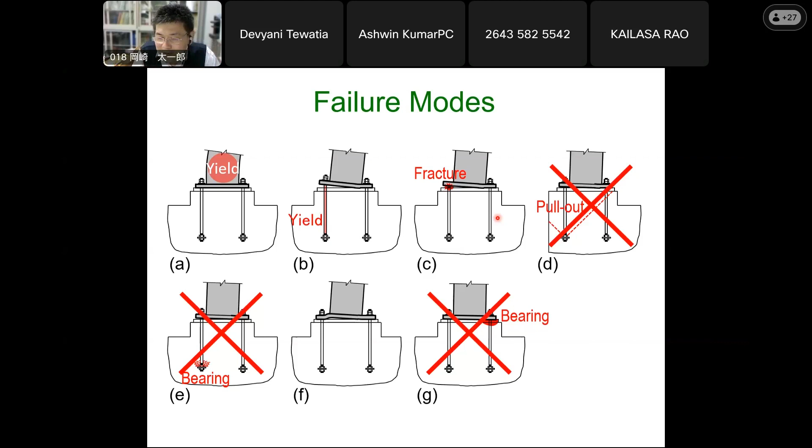And if you have 4 different column dimensions at the first story, you have to design for all of them. And this column-base design will also interact with your foundation design. So if you can imagine the many iterations involved with designing something like this, you can just pick a product from the catalog. I think the market is competitive enough that this proprietary option is not too expensive.

But I also recently visited a fabricator that said they came up with something that looks close enough to this proprietary product.

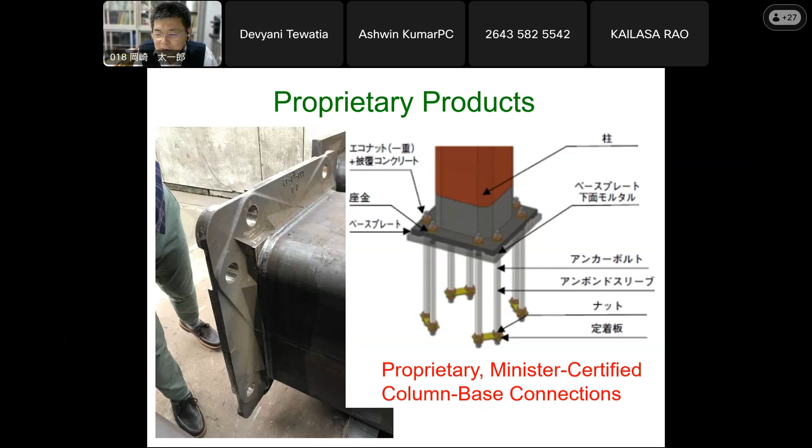How can we minimize the risk of brittle failure of high-strength steel in high-rise buildings? That's something I didn't discuss today, but there are two things being done in Japan. One is that there has been very extensive study on the toughness of steel and measures for quality control of steel. Let me go back to that table.

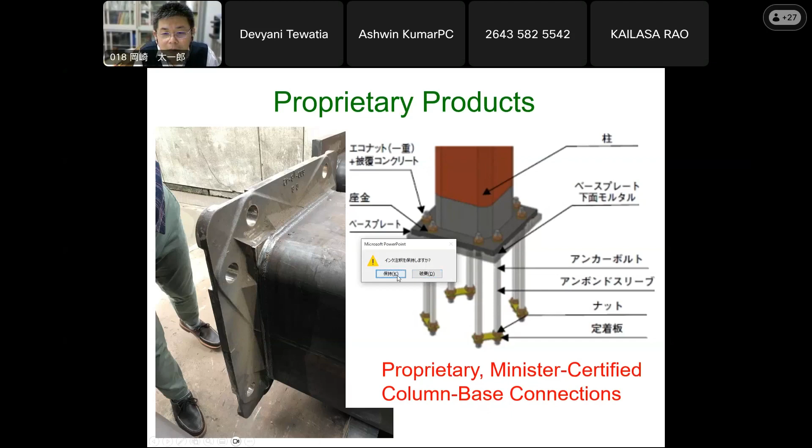Oh, wait a minute. I'm good. I hope this is visible.

If you weld high strength steel, there is a higher grade than this, and the highest grade has a yield strength of something like 600 Newton per millimeter square. But if you go that high, it's impossible to find a weld electrode that matches that grade. So in that case, the current guideline is to make just a very big fillet weld. That's one thing I can say.

Second thing is that for SA 440 with a yield strength of 440, this is used very commonly for high-rise buildings, and for this one there is a matching weld electrode. Including such weld product for high-strength steel, there has been extensive study, and there is quite a severe Charpy requirement to qualify for use in seismic applications.

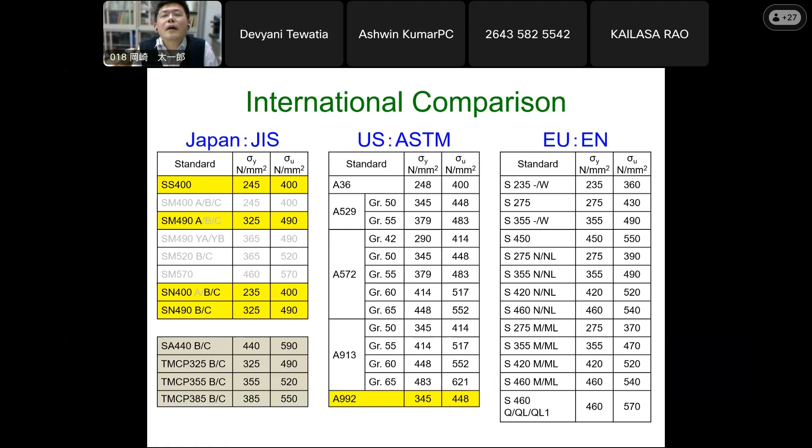Shall we take one last question? Are there any stresses generated in the steel during the bending process, specifically in reference to the fabrication of curved built-up sections? Yes, that is...

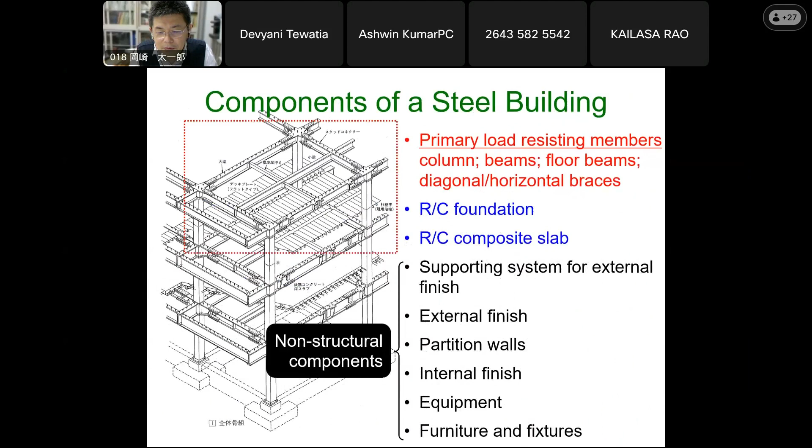That is a big problem that the Japanese construction industry or engineering community has overcome. Wait a minute, where's that? Where is that? Where did I show that? I'm sorry, I forgot where. Okay, here. Yes, okay.

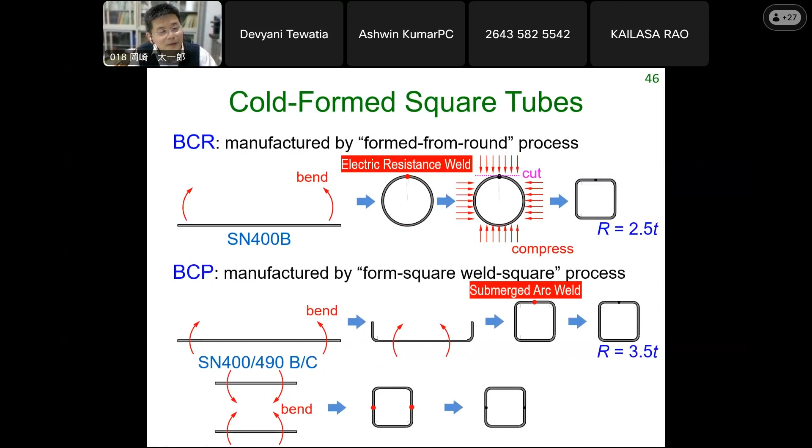95% of steel buildings in Japan and 99% of office buildings in Japan use this BCR or BCP. These products are made by cold forming, and yes, the effect of cold forming is substantial at these corners.

But about two decades ago, there was a lot of testing done for the columns themselves, and also for the beam-to-column connections, to establish that even with the altered properties at this corner, these columns perform good enough. These columns are still designed with a penalty—they're penalized with a reduction of strength when they are proportioned. And we have a strong column, weak beam requirement, so that the action on the columns would not be too big, so that we don't expect column hinging everywhere.

Now, what happens with cold forming, especially at this corner? As I write here, the outer radius is 2.5 or 3.5 times the thickness. This is quite substantial bending. What happens is that you strain harden the material, but there's also the aging effect. Aging is that after you plastically deform the steel, there is a further increase in strength and loss in ductility with time.